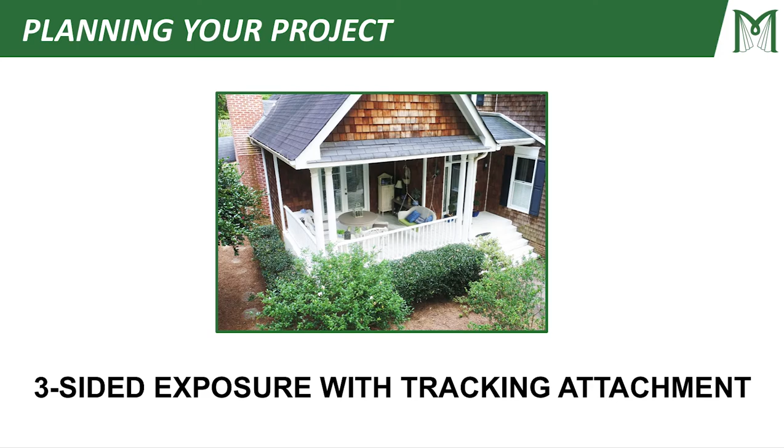In this session of planning your project, we're going to talk about a three-sided exposure with a tracking attachment. The concepts are exactly the same for two-sided, multi-sided, and even wraparound applications. Basically, if you've got a corner in your project, this three-sided exposure is going to teach you the skills you need to handle just about any project out there.

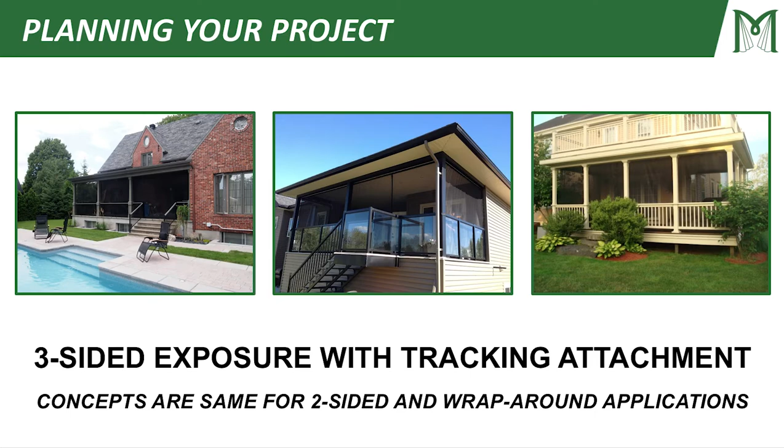Before we get started, I want to talk about when you might want to call in your order. Many people are going to have rectangular panels by the time they're done planning their project, and those are extremely easy to order yourself online. But some people are going to have more complex applications where they have sloped floors, notches in a curtain to avoid an overhang, or a slope on the top of their curtain that they'll have to deal with. When you have these more complex scenarios, go ahead and phone in your order so we can help you complete it and get it sent out to you as quickly as possible.

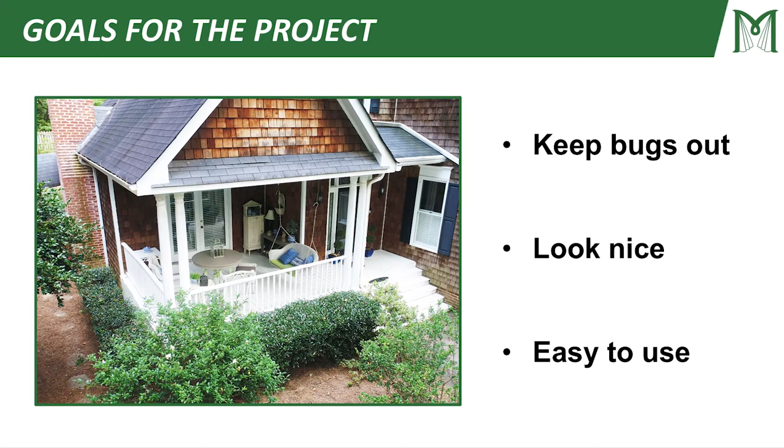We've got a few goals for this project. Number one, we want to keep the bugs out. Secondly, we want it to look nice. And finally, we want it to be easy to use.

When choosing your perspective, I want you to use the perspective that you are on your porch looking out towards your yard. This way we can agree on what is left and what is right.

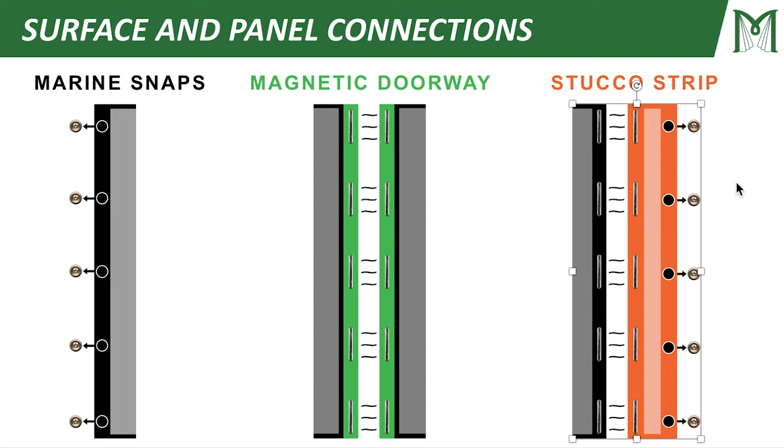At this point, you've probably seen a series of videos that introduce you to our surface and panel connections. We have marine snaps that allow you to snap to a wall or a column, magnetic doorways where panels can attach to each other with a magnetic connection, and then we've got stucco strips, which is basically a combination of the first two panel connection types.

There are three basic steps to ordering. In step 1, we're going to talk about your panels. Step 2, we're going to talk about the tracking. And finally, we're going to talk about the attachments that you need to put it all together.

So let's jump into step 1, panels. There are two basic paths you can take whenever you're setting up your panel configuration. The first path is the outside hang, where you go on the outside of the columns and outside of the railing. The second type is an inside hang, where you go on the inside of your railing and on the inside of your columns.

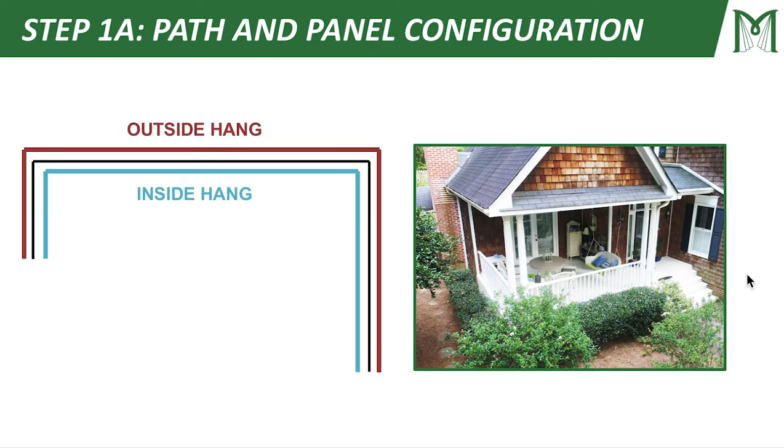There are two basic types of corner columns. The first type is regular, and the second type is irregular. A regular column is basically a column that you can snap to. You've got a 6x6 post here and another type of 6x6 post here. This one has a little lip at the top, but it's very minuscule. So you're going to have a pretty simple snapping surface right there, and that little lip isn't going to bother you very much. So we're still going to call that a regular column.

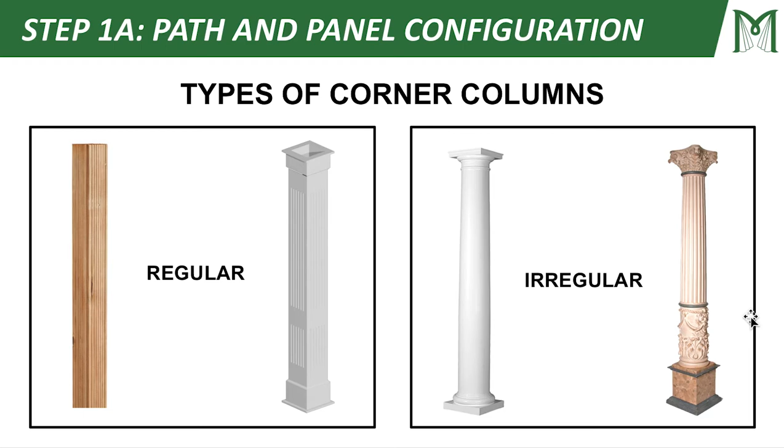An irregular column has some sort of a funny surface that you can't snap to. So it's either going to be a curved column like this, or it might be something more ornate like this, or even a spindle column.

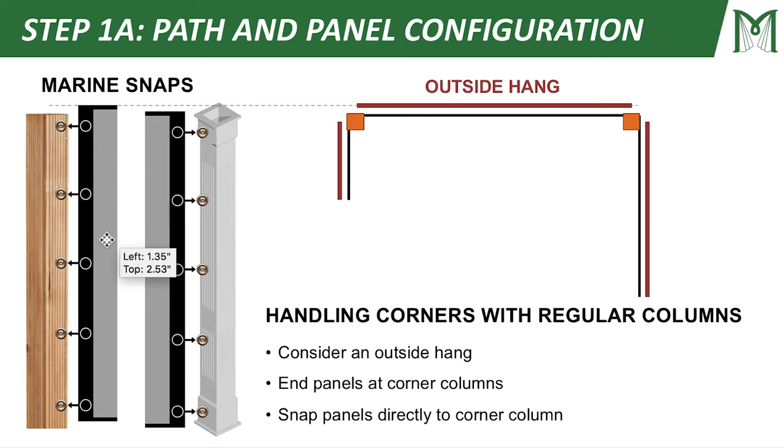First, let's talk about handling corners with regular columns. The great thing about regular columns is you can snap directly to them. So what you want to do is consider an outside hang with regular columns. End your panels at those corner columns, and then snap your panels directly to the corner column in your application.

Handling corners with irregular columns is a little bit different. Because we can't snap to this column, we're going to have to straddle that column using one of our two methods. The first method is what we like to call the right angle method. What we're going to do is use an inside hang, and I'm actually going to use the right angle method to straddle this irregular column. You can draw to a right angle, but not past the right angle, and we like to use this because it really puts out the cleanest look.

To draw a panel past a corner, however, you have to use a 90-degree curve track like this one here so that you can slide the panel around the corner.

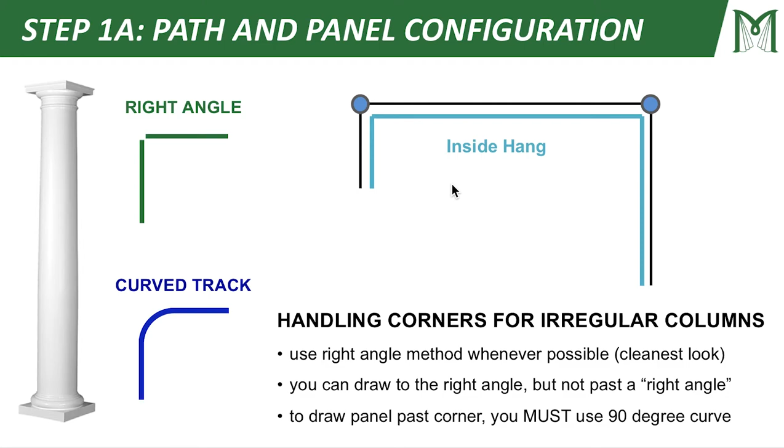So if you look at my particular application, I actually have irregularly shaped columns here, so ultimately I'm going to take an inside path whenever I do my application. But what I want to do to start is, it looks a little funny, but I've actually created my own little regular columns that I've thrown in here.

And what I want to do is pretend for a second that I have regular columns on these corners so I can show people out there with regular columns how we would deal with that. First thing I would do is take an outside hang, which would allow me to snap to those regular columns on my corners.

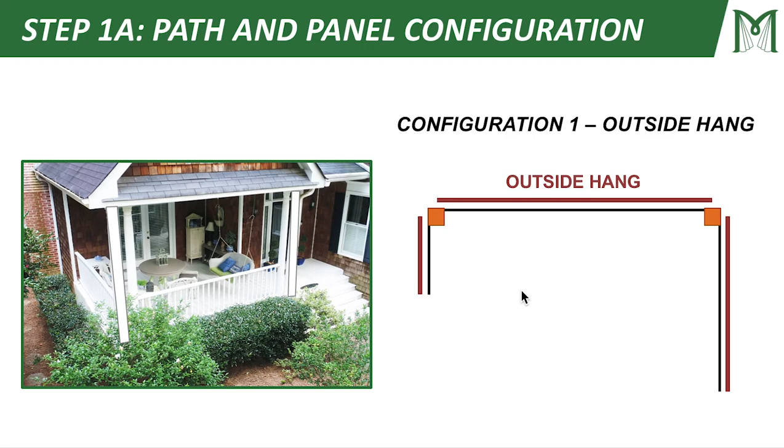So looking at configuration 1, we've got these regular posts in the corner here that I can snap to. Initially I'm going to think about this as three main panels. One panel here, another panel going from there to there, and then the final panel coming back to the house.

I can further break this down by splitting it with magnetic doorways and connections here. So now what I've got is a magnetic doorway in this panel, cutting it into 2 panels. I've got another one here cutting it into 2 panels. And then finally I've got a magnetic connection here with a stucco strip at the end that allows me to separate this panel from this edge so I can bring it back to this corner if I want to open it up.

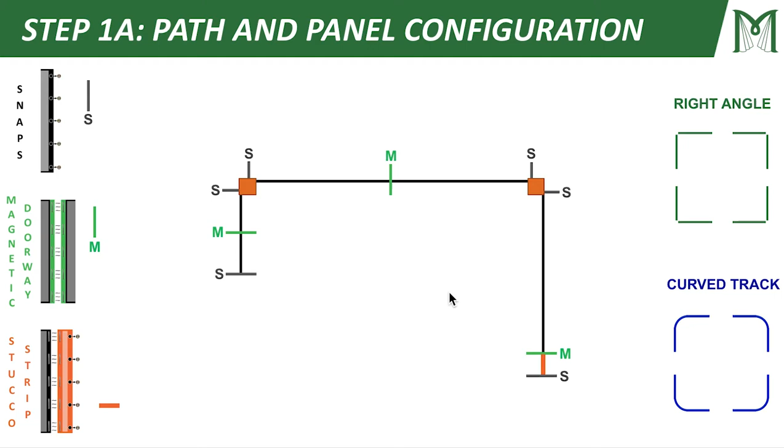So if you look at all of this, I can basically open this panel and draw to that corner and back to here. I can open this magnetic connection and draw from there to there and there to there, and obviously I can open from that magnetic connection at the stucco strip and draw to that corner as well.

So let's look at this as if we lined it out top to bottom so you can actually see your panels. What I would ultimately end up with is 6 panels. It would be this first panel and second panel, that's those 2 panels right here. This third panel and this fourth panel, that's these 2 panels right here.

And then finally I'd end up with one big panel right here, and we like to treat these stucco strips, even though it's just a 3-inch piece of material, as if it's also a kind of mini panel. Okay, so that would be my 6th panel here.

You can see the way I've got this laid out, that I'm going to be able to snap to the house right here. Then I've got a magnetic connection here, and I'll be able to snap to that column right here with this panel, and then I'll be able to snap this panel to that column as well with those snaps.

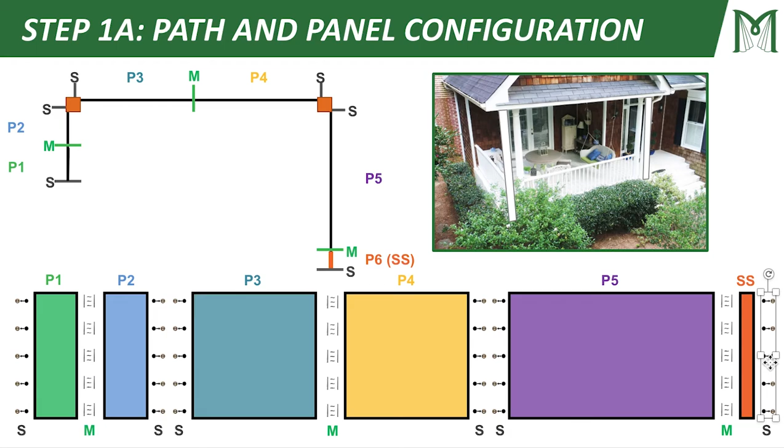The same is going to happen here with this magnetic connection, 2 snapping panels here at this column, and then all the way back home to my magnetic connection at the stucco strip, and my snaps right here at the end, ending at the house.

Alright, so we've talked about an imaginary configuration 1. Let's talk about a real configuration 2, where I'm going to use an inside hang to avoid these irregular corner columns. Now the first thing I want to do when I look at this porch is think about where I'm going to enter and exit the porch.

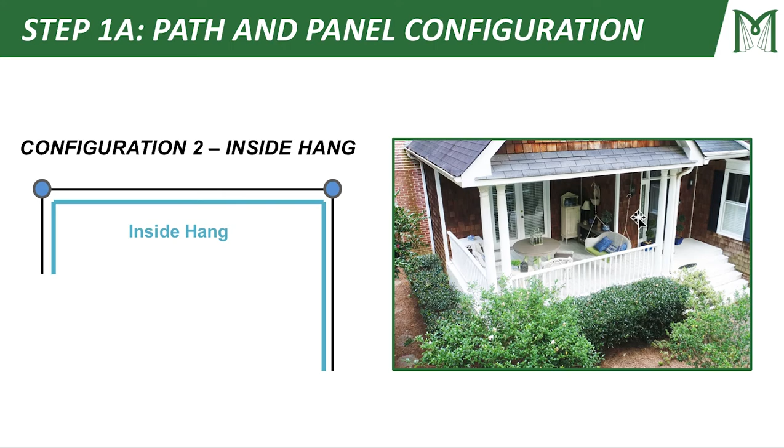Because I have railing here and here, the only place I can actually enter and exit besides my back door here is right behind this swing that goes onto the front porch by the front door. So I'm going to place a magnetic doorway right there so I can get on and off the porch. As you can see, I've placed the magnetic doorway right here.

I'm going to have a small little 2-foot panel right here that allows me to enter and exit my porch through this magnetic opening. The second thing I'm going to have is one large panel that goes all the way around, ending here in a stucco strip that connects to the other side of the house. Now that's going to allow me to do something pretty cool.

Because I have the magnetic connection here and the magnetic connection here, I'll be able to disconnect that panel here and here and pull that all the way to there and all the way to here so I can swag in that corner. But the only way I'm going to be able to do that is if I place a piece of curved track right here in this corner, because remember, I can draw to a right angle corner as I have set up right here.

This one's going to be perfectly fine because I don't want to draw past that corner. But I cannot draw past that corner unless I use the curved track, which is why I'm going to place a piece of curved track here. So this is a great example for how you can use the right angle method in a place where you don't want to draw past the corner, and a piece of curved track in an area where you do want to draw past that corner for a particular application.

Another thing I really like about this configuration is my huge panel here is going to allow no seam in my main opening where I look out into my yard. Because I can make these things pretty much infinite length if I want to, I'm going to have an amazing view of that Georgia sunset as I look out this front porch.

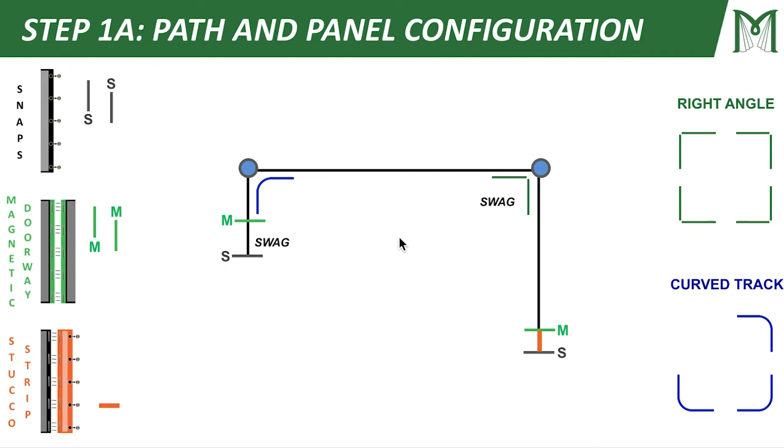So let's take a look at this thing laid out left to right and top to bottom. Basically what I wind up with is that little P1 panel right here, and then one major panel coming all the way around to the stucco strip at the end. So technically we like to think about it as 3 panels: the first little panel, the second one, and then the third panel, even though it's very small, is our stucco strip. We like to treat this as a mini panel.

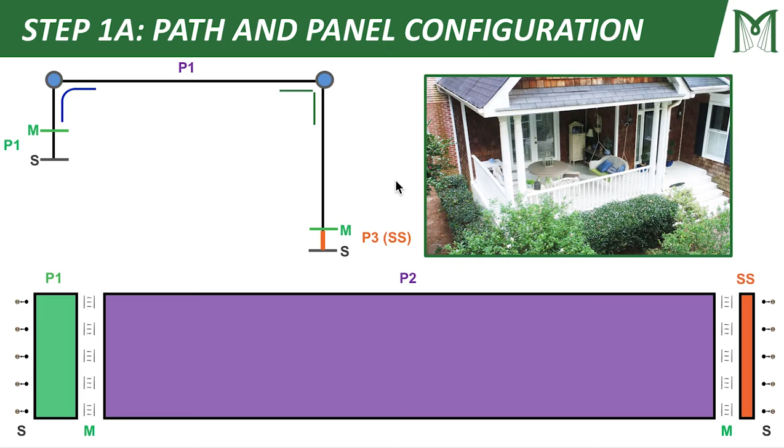So let's talk about how to measure this porch. First thing you're going to do is measure the width along the path the curtain and the track will take, without any adjustments or overlap. So I'm going to measure that side over there, this front, and then this side, on the path the curtain and the track will take, which is just going to be just inside this railing at the top here.

The second thing I want to do is measure the heights at all four corners, from the underside of the track surface down to the floor. In my particular application, these are all going to be equal heights, all 108 inches, perfectly level, so I'm pretty lucky. But in some cases you'll have different heights on these corners, and in that case we can definitely still service it and make a panel that'll be perfect for your porch. It just might have to have a little slope in it so it can handle the difference in height.

What we like to tell people in this scenario, whenever we're talking about height, is if it's within about 2 inches, you're not going to have to worry about that height variance. Just go ahead and take the difference in the two heights and take that as an average, or you can take the larger height and use that, no problem.

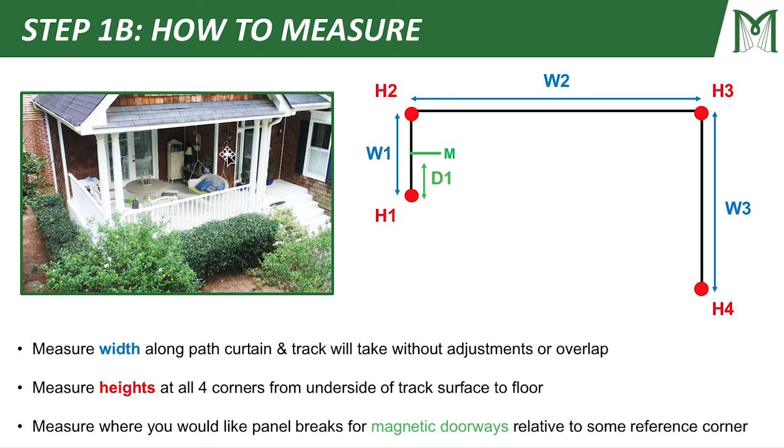Finally, you want to measure where you would like panel breaks for magnetic doorways relative to some reference corner. So like I said, I'm referencing this corner right here, which is that white line behind that swing. And what I'm going to do is come out about 2 feet there for my magnetic connection. So let's talk about our actual measurements.

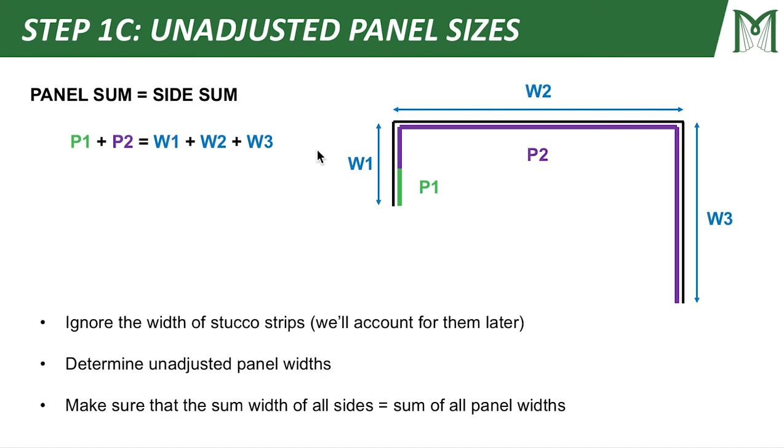First off, you want to ignore the width of stucco strips, we're going to account for them later. Secondly, you want to determine your unadjusted panel width, so you don't want to be adjusting any of these on your own. You want to take the exact measurement that your curtain and track is going to go along. And then you want to make sure that the sum width of all the sides equals the sum of all the panel widths. So P1 plus P2 needs to equal W1 plus W2 plus W3 here.

So let's take a look at our actual numbers. I've got a 70-inch side over here, which is where my magnetic doorway is going to be. My front side is 165 inches across, and then it takes me 144 inches to get back to the house. So if you look at my two panels, I've got the 24-inch and this 355-inch panel. Those two need to add up to be the 70 plus the 165 plus the 144, and that is the case, because my 379 inches does equal my 379 inches. I am in good shape on my measurements.

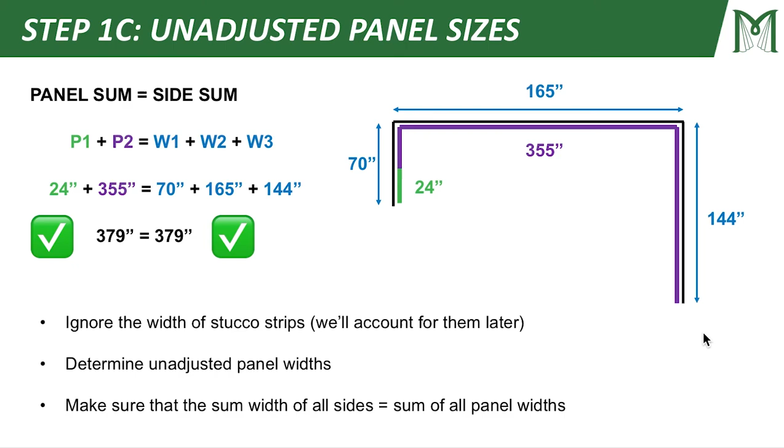Now let's talk about the width adjustments, assuming that you measured just the exposure without any overlap.

We have 4 simple steps to help you make your final panel adjustments. So let's jump right into it.

In P1, we've got a 24-inch panel. Number 1 says automatically add 2 inches per panel regardless of width, so add 2. Number 2, add 1 inch per panel for each edge that will snap to some surface. This connects right here by snapping to this surface, so we add 1. This does not connect to a stucco strip, so when it says subtract 1 inch for each edge connecting to a stucco strip, we don't have to worry about that, so minus 0. For tracking attachment, add another inch per 10 foot of panel width for a relaxed fit. This is only a little 2-foot panel, so we don't add any there. So our final panel width will be 2 foot and 3 inches.

Secondly, let's do the second panel. We've got a 355-inch panel. Automatically add 2 inches regardless of width. Secondly, add another inch per panel for each edge that will snap to a surface. This is only connecting to other panels with magnetic connection, so we add 0 because we are not snapping to any surface. Third, subtract 1 inch for each edge connecting to a stucco strip and ignore the width of the strip itself. This is actually connecting here to a stucco strip, so we go ahead and subtract that 1.

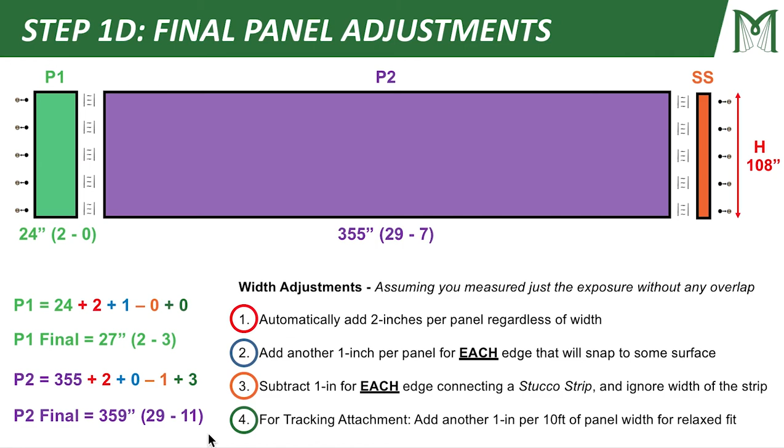Alright, we've made it to step 2. Let's order our track. The first thing to think about is you only want to splice our factory cuts. Each 8-foot length of track here comes with a factory cut on each end, so that's where we want to be doing our splicing.

Anything that you cut is actually going to receive an end cap. Now, sometimes the cut remnant isn't long enough to be usable, so that's something we're going to have to factor in as we're looking at our track, and only one track per entire side should be cut by you so that we can maintain that integrity by splicing only factory cuts.

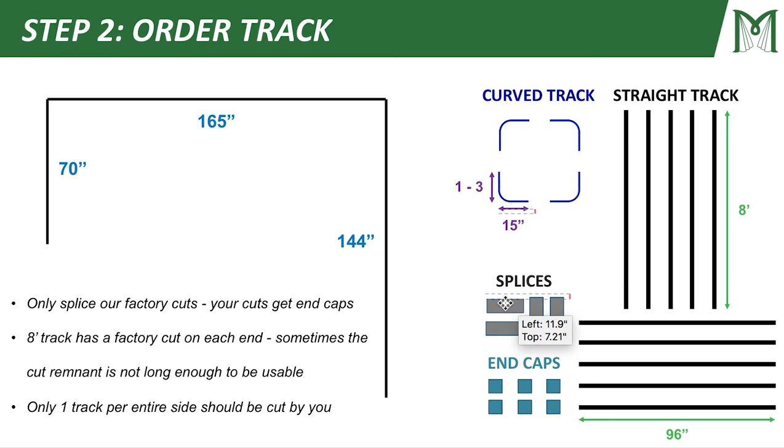Alright, so let's take a look at how this all comes together. What I like to do is go ahead and put my curved track in place because I know that's going to account for 15 inches on each side of that curved track. And then I like to go ahead and start laying in my straight track and then see what remnants I'm left with.

So I'm going to go ahead and lay these in here. There's my first piece of straight track, second, third, fourth, and fifth. I can already see that I'm going to have some remnants here.

So let's take a look at the actual lengths of my pieces of track. Because I've got 15 inches right here, I know that I need another 55 inches of this piece of track to make up my 70 inches on this side. So that's going to leave me with a 41 inch remnant over here.

This is a full track, so I'm good there. 96 inches plus 15 inches means I'm going to need 54 inches of this piece of track to finish this side. So I'm going to be left with 42 inches right there.

Continuing on to a straight piece of track there, and because I need another 48 inches to make up this 144 inches, I'm going to need that 48 inches from that piece of track, leaving me a 48 inch remnant down here. Now, if I look at these remnants, I'm going to see if I can use any of them to make up any of these pieces. Unfortunately, none of my remnants are actually going to be long enough, so these are just going to be unusable remnants left over from my pieces of straight track.

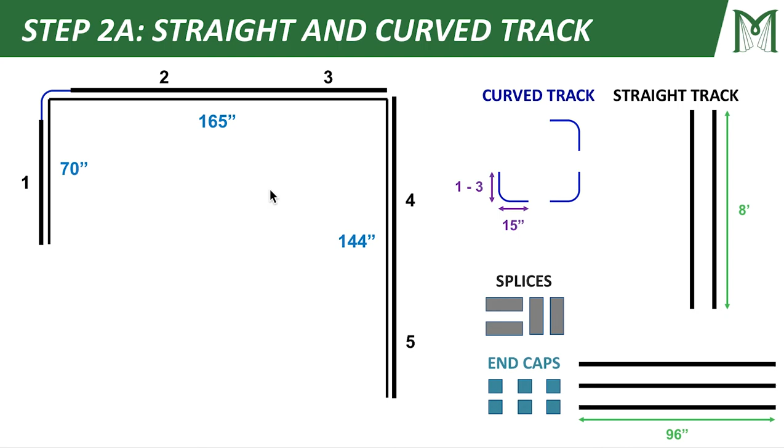Now let's take a look at splices and end caps. All track connections are going to need splices, so you can see where the straight track comes into that curved track, I need a splice. The curved track coming out to this straight track, I need a splice.

Need a splice for those 2 straight tracks and these 2 straight tracks, so I'm going to need 4 total splices. End caps keep carriers from falling out, so they're going to be required in all the ends, including right angle corners. So if I drop those in, it's logical.

This is an end of a piece of track, so that's going to require an end cap. This is my right angle method that I'm using, so that right angle corner, I'm going to be using end caps in each of those. And then finally, I've got another track ending down there, so I'm going to need my 4th end cap down there in the corner.

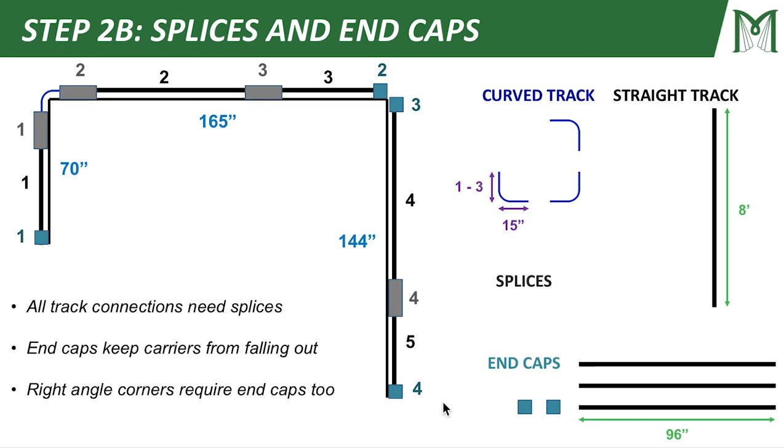So this is my final track order when I get to the order page. This is exactly what I'll order to complete my project.

Alright, so we've made it to our final step. Step 3, we're going to order the attachments. There are 4 main attachment types: marine snaps to snap to a wall or a column, magnets and fiberglass rods for our magnetic doorways, and elastic cords.

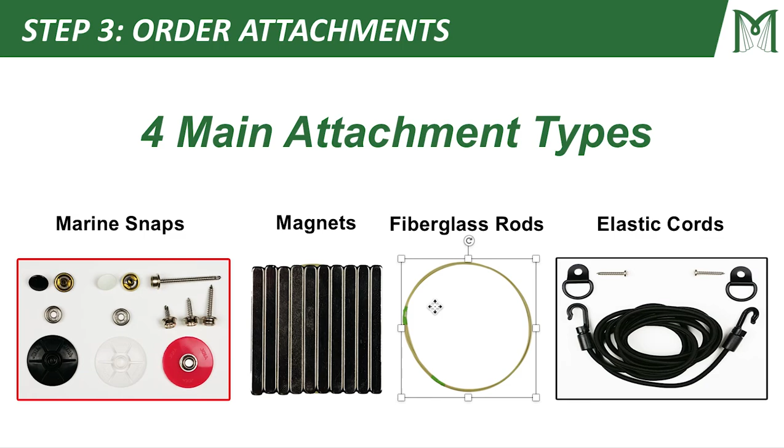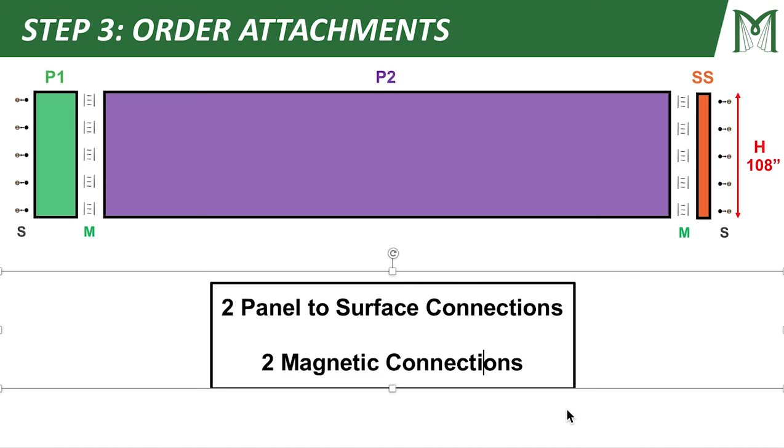First thing we want to look at is how many panel to surface connections we have and how many magnetic connections we have. Moving from left to right, I have 1 panel to surface connection here and another here, so 2 panel to surface connections. And I've got a magnetic connection here and another here, so 2 magnetic connections total. Alright, so let's talk about marine snaps.

5 snaps placed vertically is a great number to use. You'll likely use extra snaps to seal the base of the curtain. And I want you to remember that the $130 industrial snap tool is fully refundable.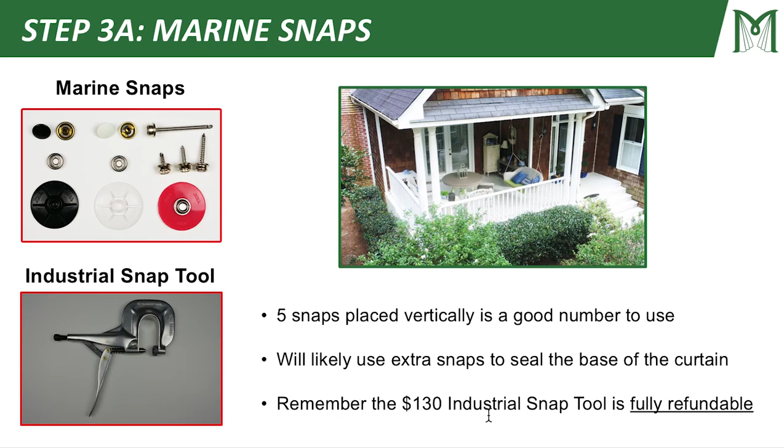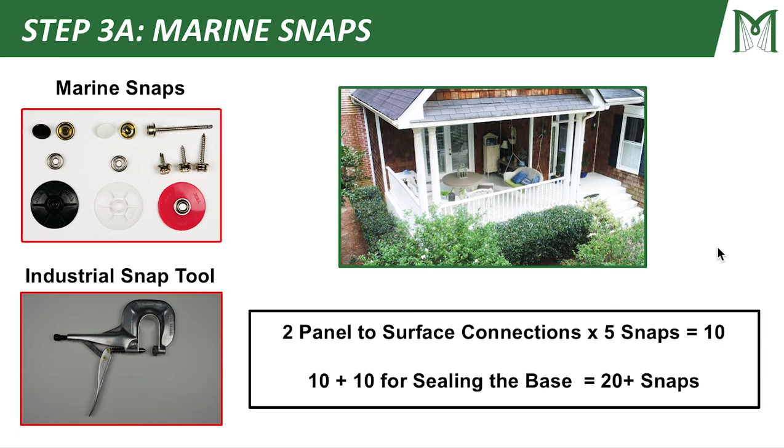So because we're going to be placing snaps here, and right here behind that swing, and I'm going to be using snaps to seal the base of my curtain around here, I'm definitely going to want to order that industrial snap tool because I know it's fully refundable and it's going to make my life way easier. So if you look at the math, I've got 2 panel to surface connections times 5 snaps is 10 that I'll need to seal the sides, and then I'll order another 10 for sealing the base. So total, I'll be ordering about 20 snaps.

Alright, so let's talk about magnets and fiberglass rods. 5 magnet pairs, which is 10 total magnets, is generally a good number to use for applications under 8 feet tall. You want to space your magnets 12 to 24 inches apart depending on your wind conditions, and each magnetic connection is going to require 2 fiberglass rods.

So looking at the math, we've got 2 magnetic connections. One is going to be here behind the swing where I'm going to enter and exit my porch, and the other is going to be back here used on that stucco strip. 2 connections times 10 magnets equals 20 magnets, and those 2 connections times 2 fiberglass rods per connection equals 4 fiberglass rods.

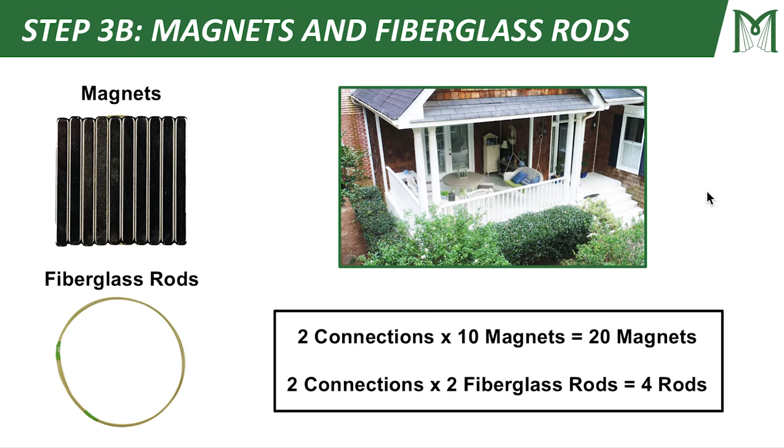And finally, let's look at elastic cords. I'm going to have 2 free-flowing corners of an inside hang. So I've got a corner right here and a corner right here. Each corner of an inside hang requires an elastic cord, so 2 corners is going to require 2 elastic cords.

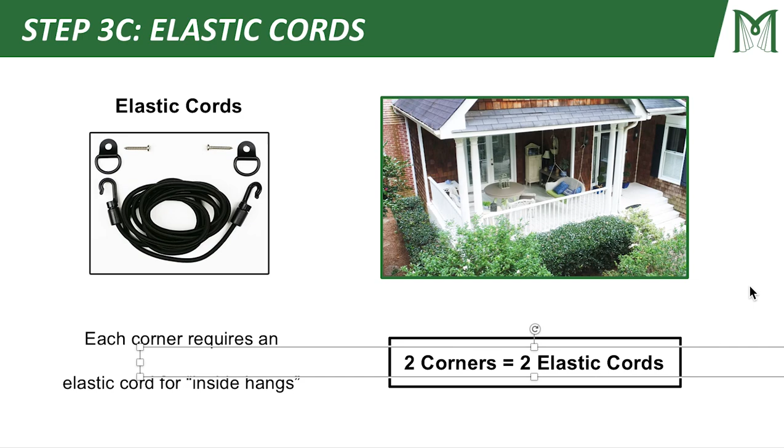So we are done with attachments, alright? So this is going to be my final attachments order. Now one thing I want to mention is order plenty, because if you order too many snaps or magnets, you can always return them with the industrial snap tool, and we'll just add to your $130 refund.

So if you order too many magnets or too many snaps or too many anything, too many elastic cords, you can always ship that back to us, and we'll happily refund it with your industrial snap tool. So we are done, this is our final order. So whenever we get to the order page, we'll be able to order our panels, our tracking, and our attachments to complete our project.